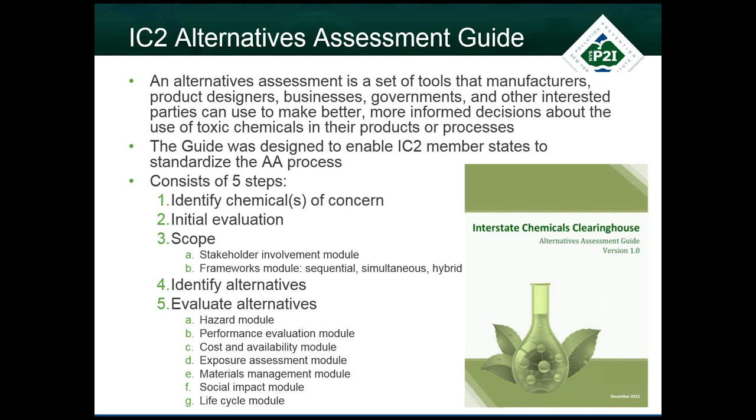So we are not going to focus so much on the nuts and bolts of how to do an alternatives assessment or what's in the guide today. Really, we're going to focus on our project assessing the guide. So I would refer anybody who has questions specifically on the guide to go to the IC2 website, and you can read and download it there.

So the focus and goal of our project really was to identify gaps in the guide by reviewing 3 companies that have implemented or are in the process of implementing alternatives. Through some of our program work here at the P2I, this is kind of what we do. We work with small, medium-sized companies that are interested in finding alternatives, whether it's alternative products, alternative chemistries, etc., and help them assess them and implement them.

So we used our expertise and our staff, and then we used the staff of the companies as well. We wanted to better understand the information that companies actually use to make a decision. You can go through the process of the guide, but we were curious, how does this work in real life? At a small company, how are they really making a decision, and what kind of information are they using to make that decision? And then what kind of information are they using to actually take an action once they make that decision?

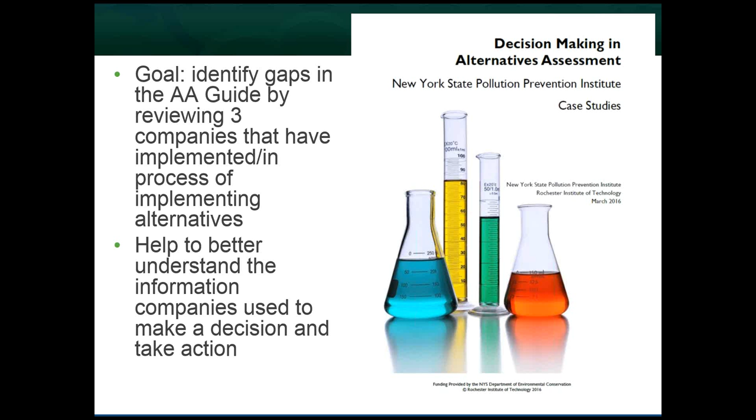So this picture here is the front of our report, which I believe is available on the IC2 website as well. So today we're just going to go through highlights of that. There's a lot more detail in the report itself.

So the process we used: we identified 3 companies in our portfolio. I'm going to go through each one of these in a little bit more detail on their own slides. We conducted interviews, again, with company staff. So we talked to the people within the companies that were in charge of these projects. And then interviews with our staff as well, so P2I staff that worked on the projects.

We then compared and contrasted the methods that they used to evaluate alternatives and those same methods that are in the guide. So did they follow the methods, how, to what level, etc. And then we have some changes or recommendations to the guide to further improve interpretation, facilitate decision-making, and even make the guide more user-friendly, if you will.

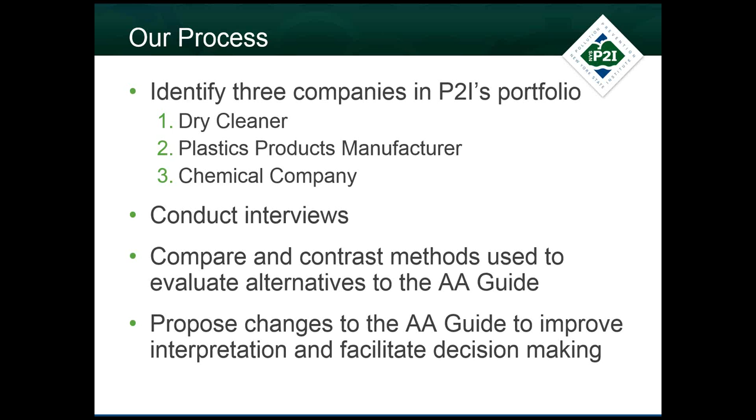So jumping into the 3 case study companies we used, the first was a dry cleaner. I manage our professional wet cleaning program, so this was a company that I'd worked with. Really their driving factor, they were looking at eliminating PERC, or perchloroethylene, at the cleaner. So their big factor was health and environmental concerns that they were having at the cleaner.

Really it was their family that were working within the shop that were having health effects, and they wanted to eliminate those. So the owner's method for evaluating and even identifying alternatives: he visited other cleaners, so he visited other shops that were dry cleaning, attended a big trade show out in Las Vegas, and in the end visited a wet cleaner. So once he narrowed down his options, he started out casting this broad net of different alternatives, and then narrowed it down to, okay, he's interested in wet cleaning. Then he went and visited a wet cleaner.

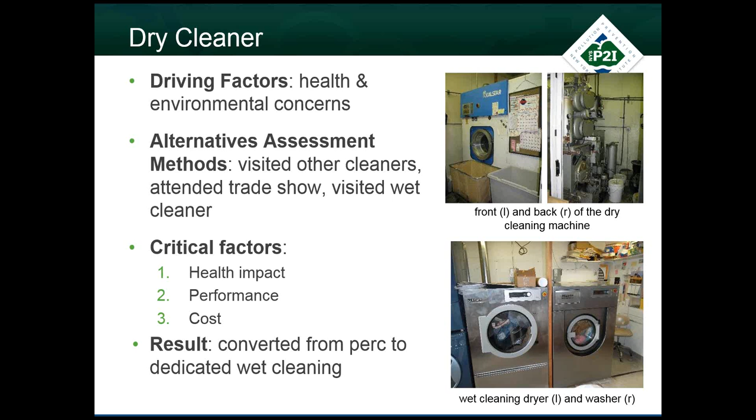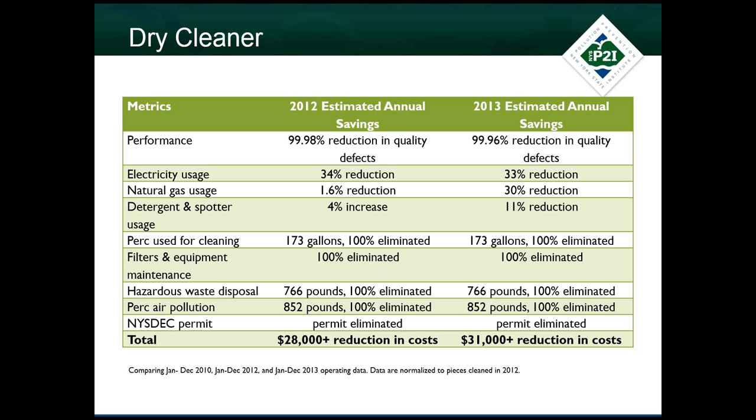And the 3 critical factors for alternatives in this case were health impact, of course, since that was the driving factor; performance, the alternative had to perform at least as well, if not better than PERC; and cost, of course, had to be cost effective. So in the end, the cleaner did convert from PERC to dedicated wet cleaning. And this is the only case study that we have that we were able to get really solid financial impact results for. The other 2 were not so forthcoming in providing exact dollar amounts, but the cleaner, we at least were able to get some information there.

The plastics product manufacturer, so their driving factor was an environmental concern. So this manufacturer makes a polypropylene-based flue duct material. That's the picture that you see there.

This is a product that's widely used and accepted in Europe. The challenge they had is that here in the US, it needs to meet the UL standards. In order to meet the UL standards, you have to have an added flame retardant, and they are not happy with the typical flame retardants on the market. They all have environmental concerns associated with them. So that was their main concern, finding an added flame retardant which doesn't have those same concerns.

So how they identified alternatives and then assessed them: speaking with current suppliers, doing some very basic internet searches, talking with industry experts. They're even talking with UL, saying can we change the standard? Does UL have ideas for how they can meet the standard, etc.

Their critical factors were environmental risks and manufacturing criteria. Once an alternative meets those criteria, they go to internal performance testing, and finally to UL testing. And this is as of the spring, they're still seeking an alternative. They haven't been able to find something they can use in their product.

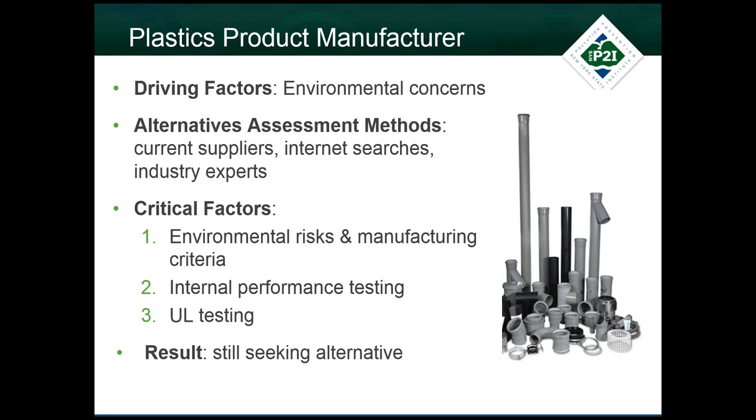And lastly, the chemical company. This company uses MEK to essentially weld plastic pieces together, and they need to meet a new DEC, a New York State DEC revised air regulation, which limits VOCs. So they had to go from 2,000 gallons a year of MEK down to 55 in order to meet the VOC limit. That was really their goal.

They weren't really concerned so much with environmental issues or human health. It was really to meet the regulatory requirements.

So the way alternatives were evaluated and identified here: research, consultation, physical testing. We did a lot with this company to find alternatives, expert knowledge of plastic bonding, internet searches. We talked with sales reps, we talked with the DEC themselves if they knew of alternatives, benchmarked other adhesive applications, and did lab trials on a bunch of different alternatives, etc.

And then their main critical factor really is performance. They had 7 key criteria that needed to be met. In addition to this reduced MEK value, it was really performance that they were focused on.

In the end, they actually chose to go with a reasonable available control technology, doing more careful handling by operators to reduce usage down to 55 gallons per year. We were unable to find them an alternative that met their needs and also met the VOC limit needs.

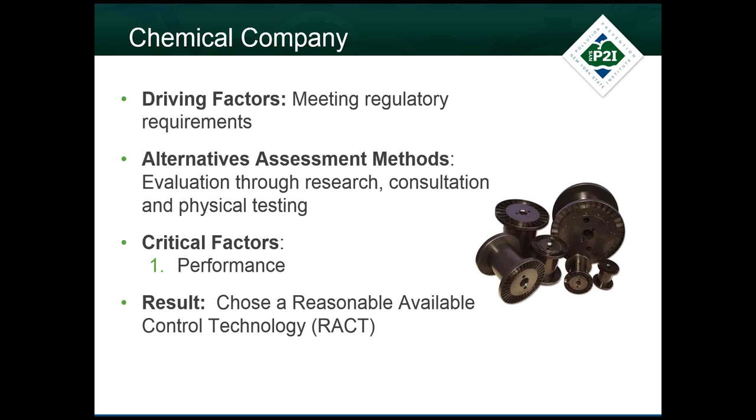There's a couple things I'll highlight. In the frameworks module, really only the dry cleaner followed a true framework as outlined in the guide—they evaluated hazard, cost, performance, and exposure at the same time. The other two, the plastic products and chemical company, really didn't fall into any of the three frameworks: simultaneous, sequential, and hybrid. They didn't really fall within each one of those.

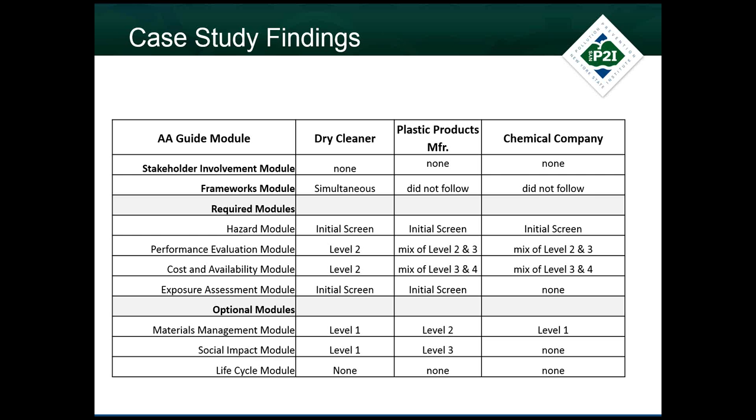It was interesting that environmental endpoints were really only considered by the plastic products manufacturer. No one else took into consideration anything having to do with the environment—it wasn't a priority for them. The chemical company was focused on meeting regulatory requirements, and for the cleaner it was really health they were interested in. None of the case study companies had any kind of life cycle thinking. That would have been very progressive for them, to think about anything up chain or down chain, etc.

One finding we had, we really wanted to compare or understand were there attributes that the case study companies evaluated, some piece that they really included in their assessment and thought was important that the AA guide did not include. We did not find that to be the case. We found that all the attributes that the case study companies talked about and used were already included in the guide. So that was a good finding.

But obviously all the modules and all the pieces of the modules were not addressed by each of the case study companies. The first opportunity for improvement or recommendation is really to have a good goal and scope definition. I'm going to talk about this more on the next slide.

One thing that Kim and I found that we even struggled with sometimes is that the lines between a lot of the modules are kind of blurred, and it can be challenging to understand where do I place an impact, under which module does it go, right?

So this doesn't sound like it's that big of a deal, but you don't want to end up with double counting of impacts, right? And what happens is now you're getting bogged down in the minutia, in the details of, oh, where does this impact go, under which module does it go? That doesn't really matter. What matters is that you're evaluating that impact.

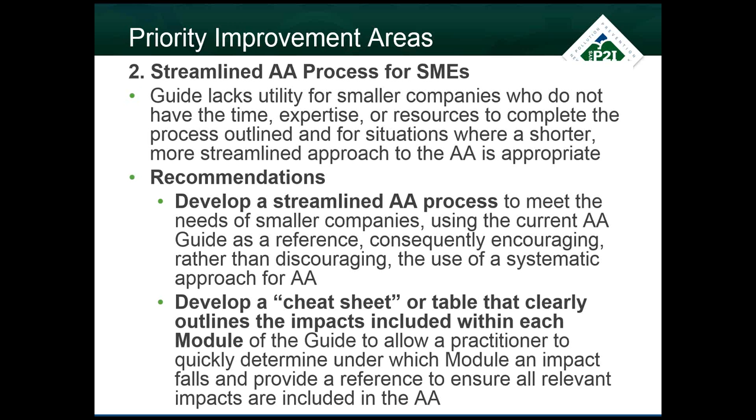And then to go along with it, having a cheat sheet or table that outlines the impacts included within each module, which ensures that all the relevant impacts are included. It could be a way for a practitioner, once they've set their goal and scope, to check it against this cheat sheet and see if they're missing something that should be included.

And then lastly, some guidance to display results. These are just some examples, and really our recommendation is to put these in as examples. These are not meant to be the way to do it—just examples and methods to do it.

Having a set of yes, no, or pass-fail criteria for each of the modules, and then determining criteria for each module and evaluating them relative to the alternative—it could be better than, less than, equal, plus, minus, equal, etc. Both of those are really good for a preliminary screen, so you have a large set of alternatives and you want to narrow them down to some subset that continues on. The last bullet is better for those alternatives that pass the preliminary screening.

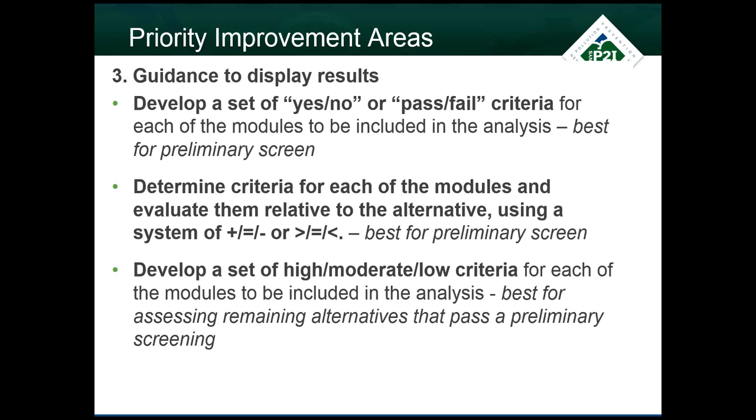So developing a set of high, moderate, low criteria—now you're bucketing them for each of the modules. And then of course, even once you do that, there'll have to be some value judgments applied to determine, well, if this is high but this is low, how do you weigh a high, medium, and low, etc. So with that, I will end for now and turn it back over to Topher.

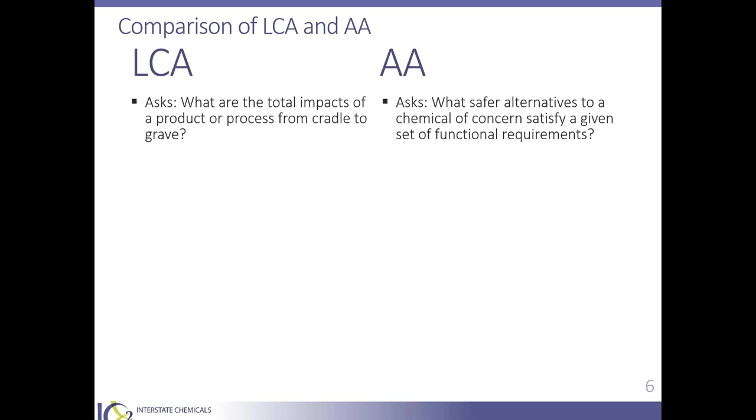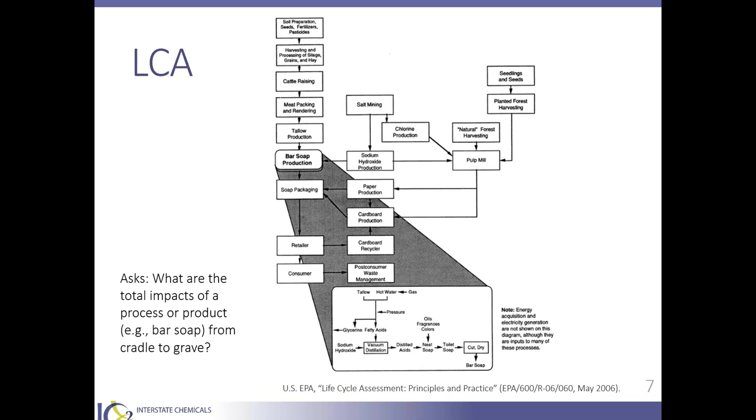I'm not going to go into this in any detail, but again, this is actually quite a simple product map or flow diagram for life cycle assessment. In this case, it's a sort of a classic from EPA's LCA 101 document focused on a bar soap. The point is that you're looking at impacts across a whole range of processes, from resource extraction to production to use, transportation, disposal, what have you.

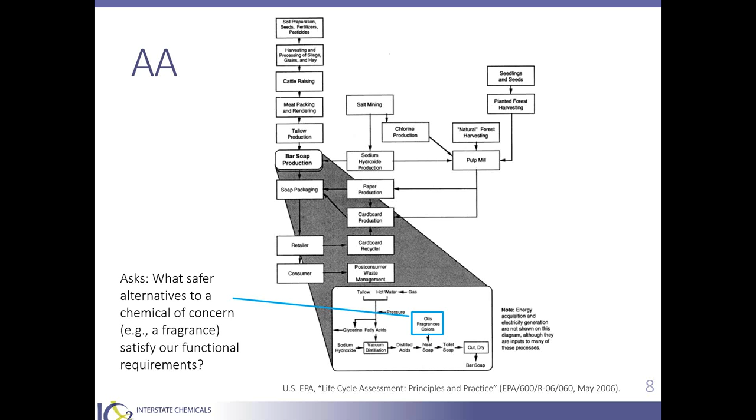In contrast, alternative assessment might actually be focused on one very specific and relatively small node, if you will, in that overall life cycle, such as if we have a concern about a particular fragrance that's used in this soap, what better alternatives are there? So again, it's from just a broad picture, a comparison of those two. Life cycle assessment is intended to give perspective on these trade-offs across this broad array of impacts, whereas AA delves deeply into human and, to some degree, ecological toxicity in these specific use scenarios.

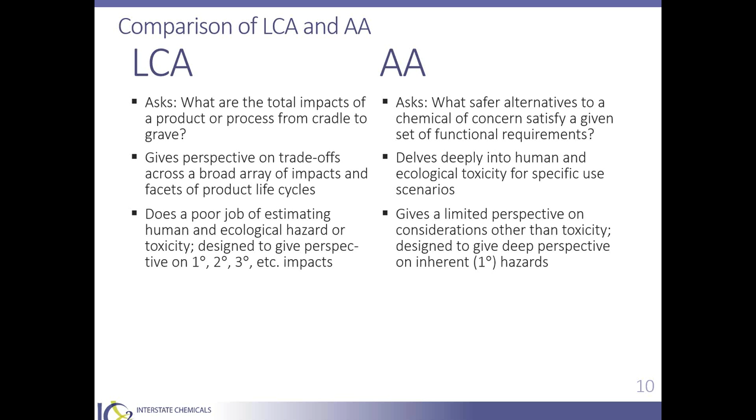This next comparison point is, in some respects, very similar to, or almost the inverse of, the previous one. Because LCA is looking broadly, it tends to do a relatively poor job of estimating specific human and ecological hazards for chemicals, whereas alternative assessment, because it's looking very narrowly, tends to do a relatively poor job of evaluating those broader concerns, which is precisely why we're trying to figure out how to improve that.

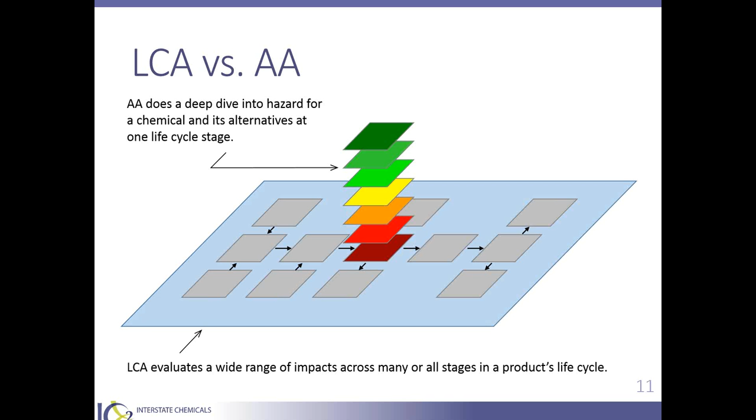Another point of comparison is that life cycle assessment tends to focus on emissions - emissions that cause eutrophication, climate change, and so on, from processes in a product's life cycle. AA tends to be more focused on chemicals, sort of in the use phase. This isn't always the case, but it tends to be true.

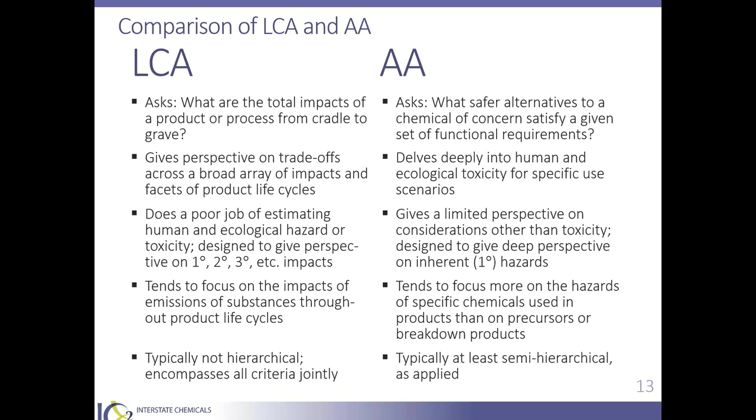Finally, I think life cycle assessment is typically not hierarchical, and encompasses all these criteria jointly, whereas alternative assessment, at least as it's practiced, is often at least semi-hierarchical. This gets into the sequential versus simultaneous application that Kate referenced, and I think most guidance for AAs suggests applying AA in a hybrid or semi-hierarchical manner.

So, some suggestions for integrating life cycle assessment into alternative assessment. In general, I think the advisory group that contributed to this project agreed, for the most part, that the earlier you can incorporate life cycle thinking - not necessarily life cycle assessment, but a life cycle perspective - into alternative assessment, the better. So the overarching suggestion for practitioners is to do that, and if necessary, apply a more rigorous life cycle assessment later if you're still having trouble distinguishing which alternative is truly preferred.

Some more specific items of guidance: understanding and mapping the product life cycles at the beginning of the alternative assessment. I want to touch on what Kate was talking about in terms of the importance of doing goal and scope definition - a phrase associated with life cycle assessment, but also very relevant in AA. Clarifying and understanding the landscape, the map of your product and supply chain as part of that goal and scoping exercise is key, and can help identify potential hotspots in the supply chain to take into consideration.

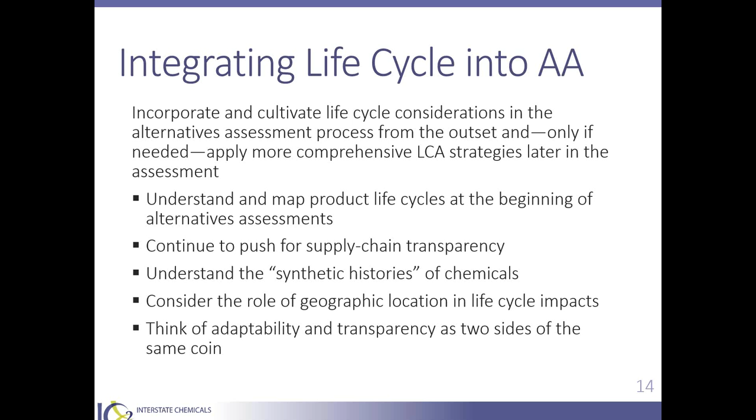So consider geography. And again, touching on what Kate was talking about, the IC2 guide was designed, and general AA guidance is designed, to be flexible and recognize that different practitioners need to apply the methodology differently to suit their needs. But it's good to remind them of the importance of clearly documenting the assumptions you make and how you're applying this process to your own assessment, so others can appropriately understand and interpret what you've done. So that's the two sides of the coin: adaptability and transparency.